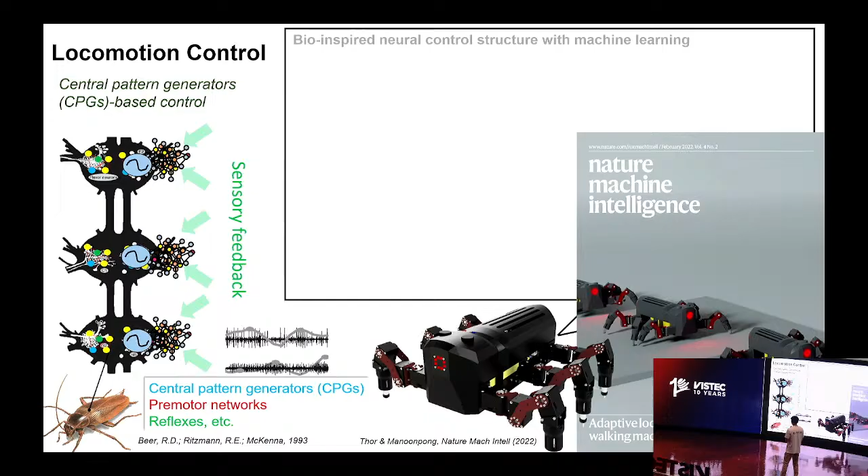We found that animals don't have one big network, but sub-networks, and different networks have their own functions. We break down the complex network into sub-network modules, and from this we created the first simple network, which consists of 2 neurons. By having these two neurons fully connected, it creates a rhythmic pattern, which is the baseline that can generate rhythmic movement and motions.

Afterwards, you need to shape that pattern into proper behaviors or motor patterns. You translate from the original rhythmic pattern from the 2 neurons in blue through the red neurons here. This is just a nonlinear mapping from one rhythmic pattern into something more complex.

What we do here is that once you have this architecture, you just learn the connections from the blue, or from the red, to the yellow neurons. That makes the network or the parameters small. You don't need to learn a big network because you create this from your own understanding.

By having this technique, you can use any kind of machine learning to adapt these synaptic connections from the red neurons to the output neurons. This way, we can speed up the learning process. The robot can learn here within a few minutes, let's say 20 minutes. We can scale down from hours to minutes.

So the take-home message here is that instead of starting from scratch, we should start from something understandable where we know the functions—what do we need? Now I'll skip this to go to the next one.

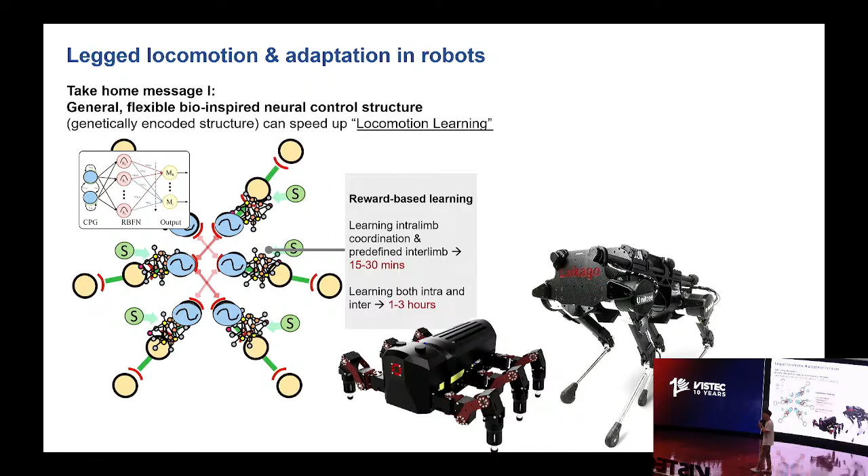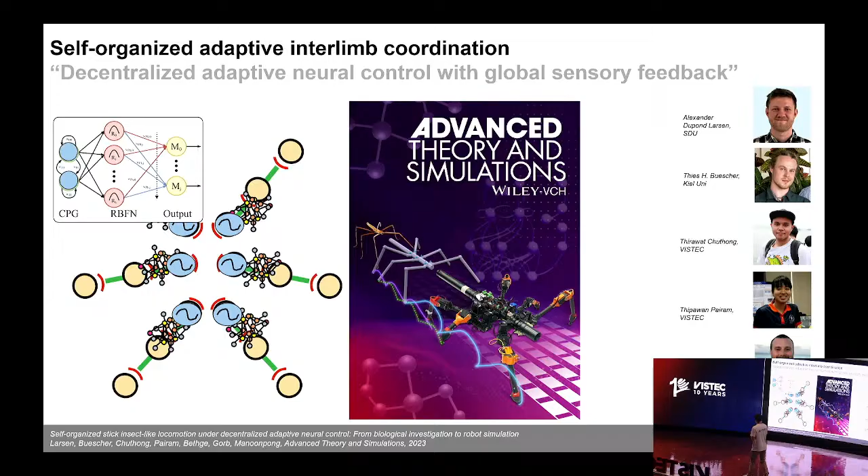The next thing I want to show is whether we can increase efficiency and decrease the learning and adaptation time from minutes to seconds. I'll skip ahead, but one key message I want to emphasize here is what we call predictive encoding.

So what do we do here? Imagine when you move or walk, you also expect something in return. When I swing my leg and touch the ground, according to that motor action, I expect to get force feedback at the end of my action. This is prediction. According to this concept, whatever you do—walking, manipulating something—you perform an action and expect something in return. That's what we call expectation.

Expected sensory feedback: what you do here is take the motor patterns that drive the locomotion and translate this motor pattern through what we call a forward model. The forward model is a neural model that translates the motor patterns that drive the behavior into an expected sensory feedback pattern. In this case, we translate the original rhythmic pattern into expected foot contact feedback using a neural network. Basically, it's just a nonlinear mapping into the expected sensor feedback.

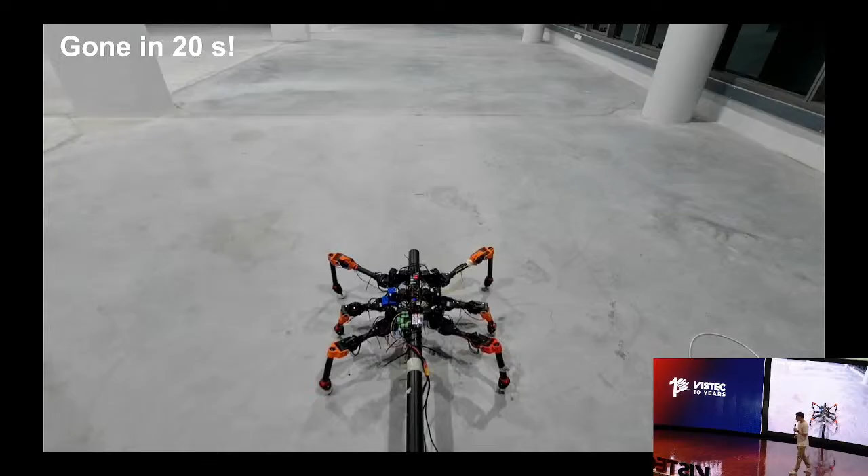This way, we implement this technique into legged robots. The robots start to oscillate. While oscillating, at the beginning, the foot cannot really lift. Because of the mismatch in error predictions, we use that information to readjust the phase relation between the central pattern generators, or between oscillators. Little by little, the leg starts to find out what would be the good phase shift by itself, and after 20 seconds, the system learns how to walk.

This is the decentralized manner. We don't let the controller on each leg talk to each other directly, but through the sensor feedback.

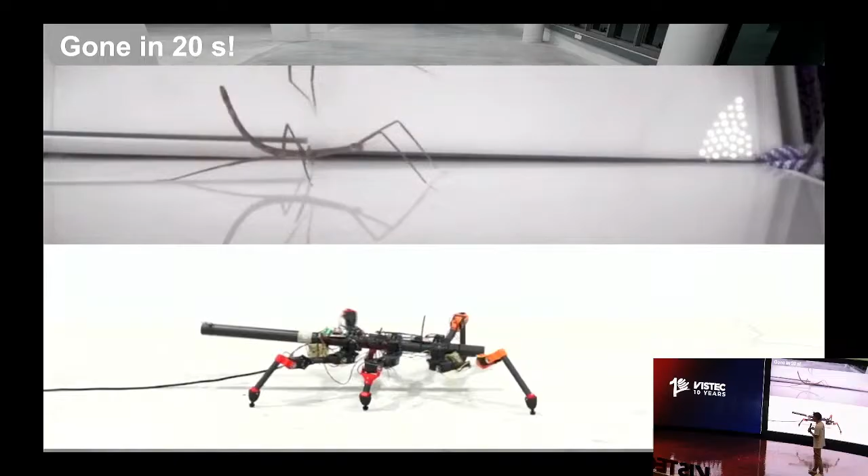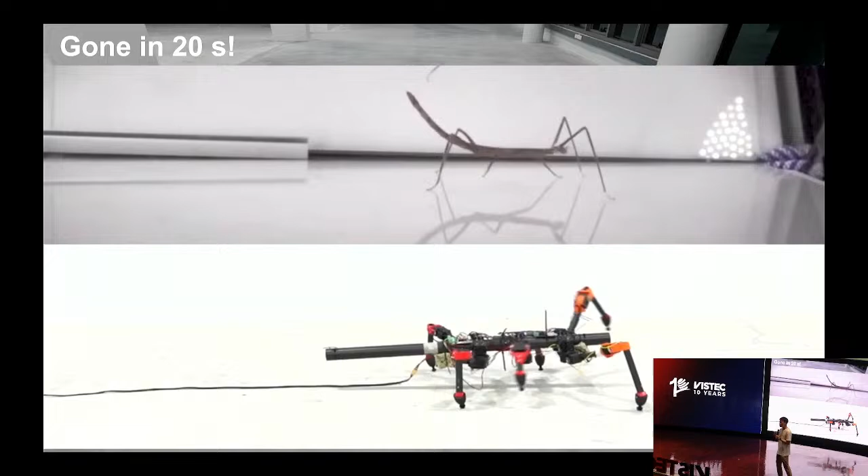Interestingly, the behavior converges to locomotion compatible with stick insects. What do we learn from this research? First, we can use just foot contact information, which is enough for forming locomotion. We don't use any joint angle, just the global foot contact information, which is enough to form a stable behavior comparable to stick insects.

I will skip all this. This is about learning and memories. I will skip all this.

So this is the other research. We look at how you can store information into machines, like robots. This is an example that demonstrates: if you look at cats, the cat can walk using visual information. Interestingly, the hind leg can step over an obstacle without seeing it. This is because the cat can store the motor pattern of the front legs into the brain, and it releases that information later. That is a kind of working memory.

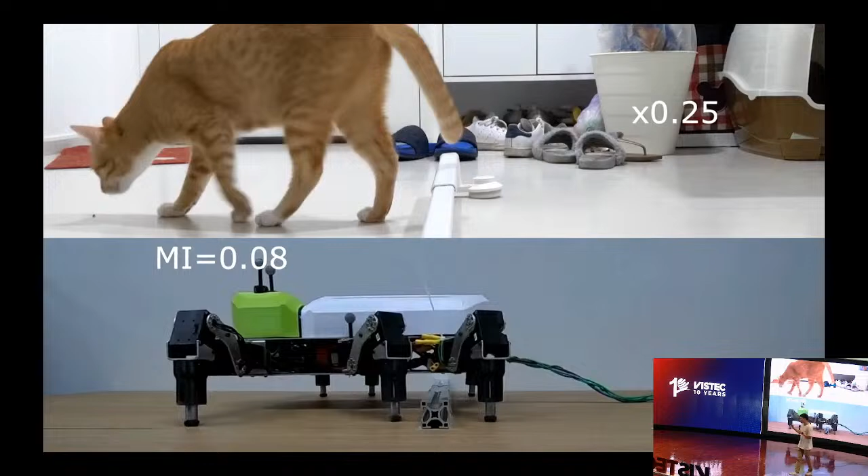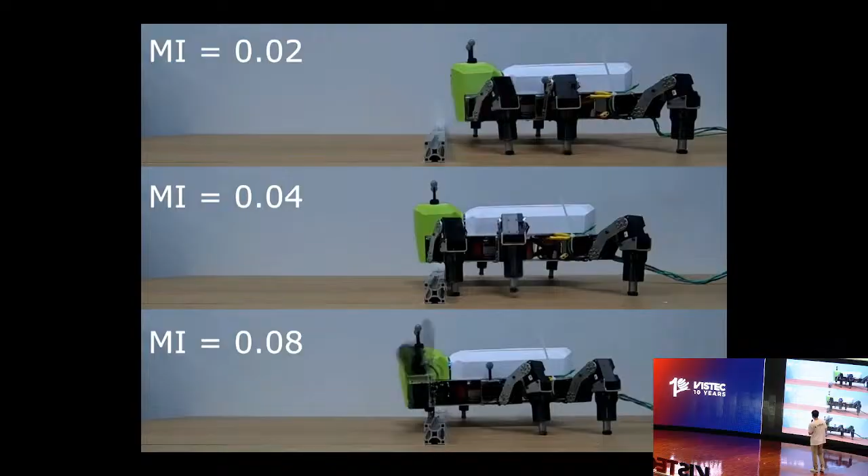We do the same thing here for robots. You can see the middle leg and the hind leg will not touch the obstacle, because we store the touching of the obstacle from the front leg into the brain of the robot, such that that working memory can store this information, try to match it to the walking speed, and release the action afterwards in time.

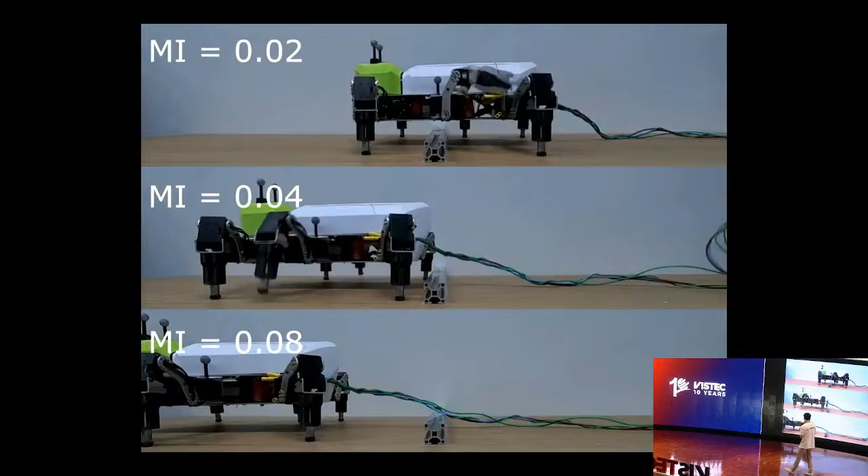One last thing I want to shortly show here is about the dung beetle, one of my favorite works. We learned from the dung beetle that it can transport a huge object. I tried the same thing myself, but it's difficult. I found a big ball and tried to push it, but it doesn't work. That's why we tried to learn how the dung beetle manages to do this.

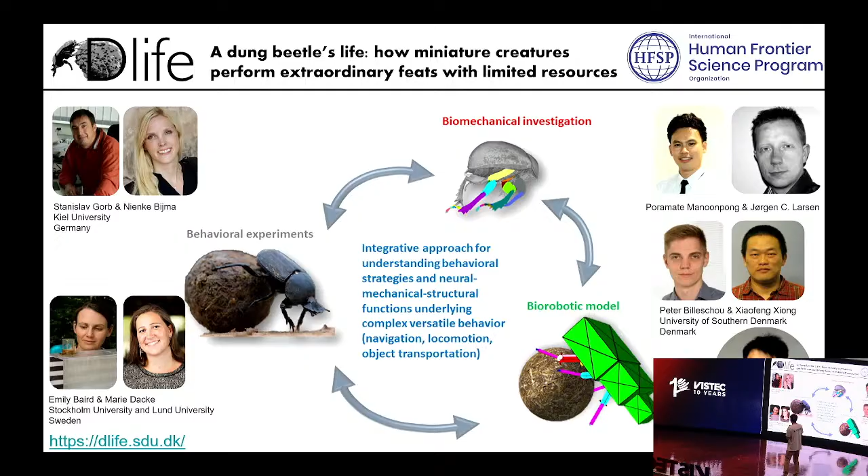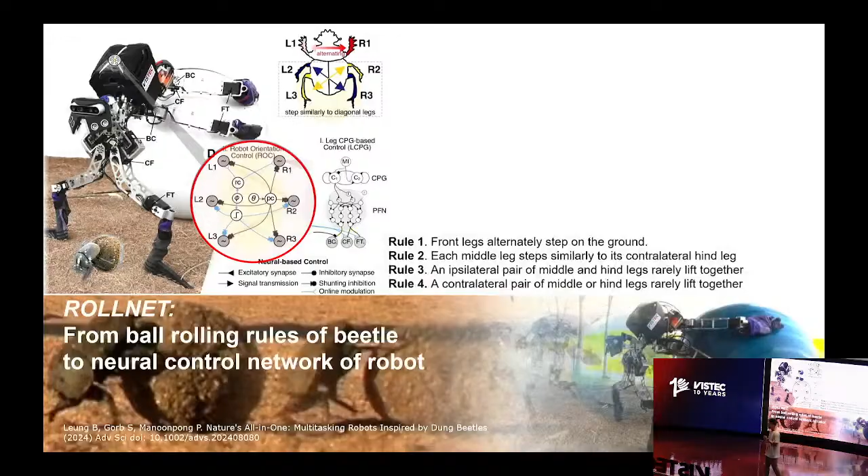From this, we came up with different subtasks. We looked at the biomechanics, and that's why I focus also on the embodiment. We look at how we can create a dung beetle-like robot by learning from nature. We look at the structure of the dung beetle, build the robot out of that, and learn some rules from the dung beetle through visual observation. We came up with a neural network that can make the robot roll the ball like the dung beetle.

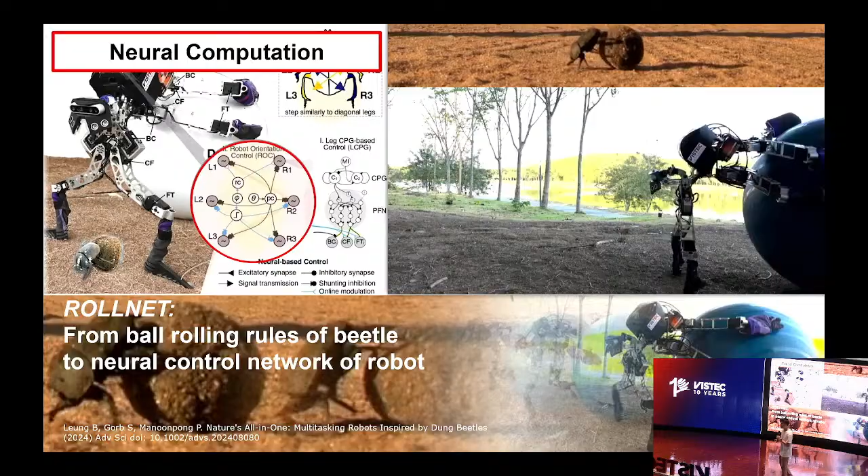Before achieving this, we implement a simple mechanism. I'll skip the rest, one last slide of mine. We look at the most simple way of controlling behavior. This is what we call Walknet. Walknet is just reflex-based control.

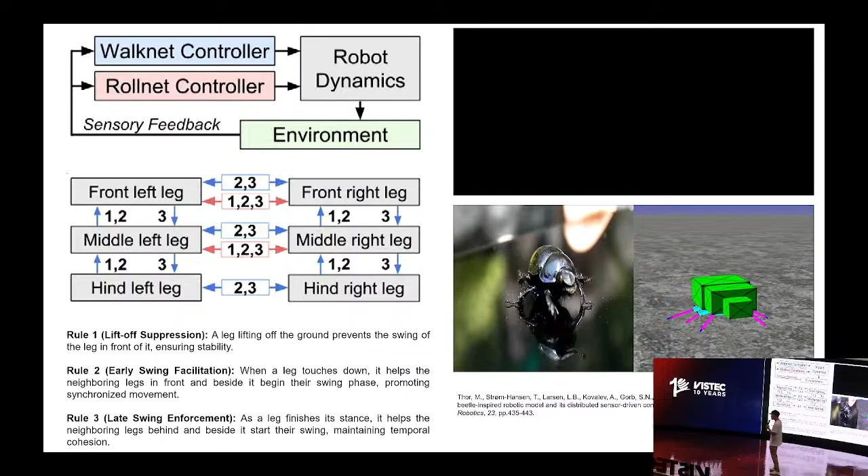What does it mean? It means you can use only sensor feedback to define or switch states of your movement. For example, we have Walknet, introduced by the famous biologist Holk Cruse. We take Walknet and adapt its mechanisms, which are based only on sensor feedback, into what we call Rollnet, and we introduced this Walknet and Rollnet on the dung beetle.

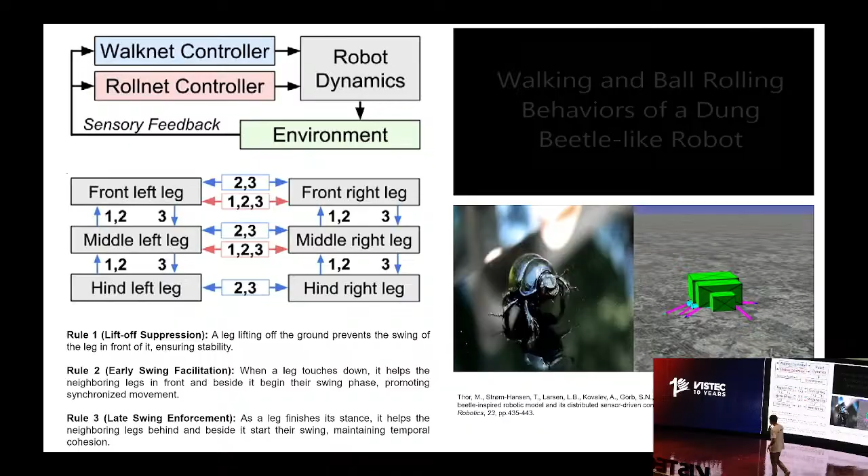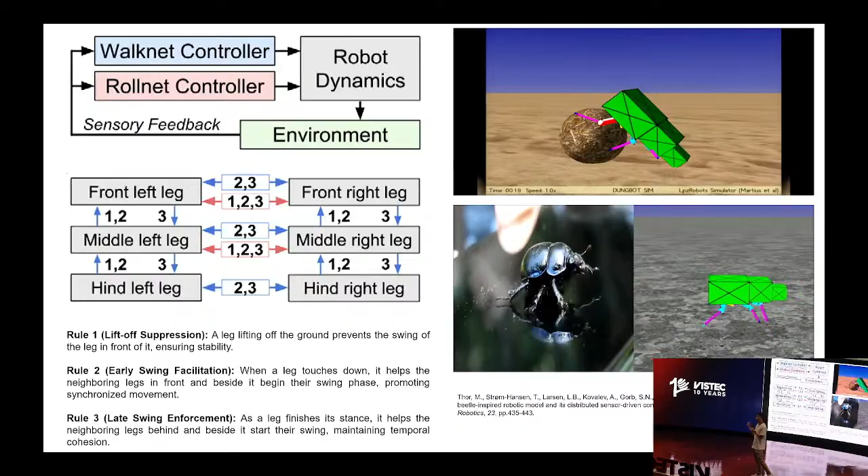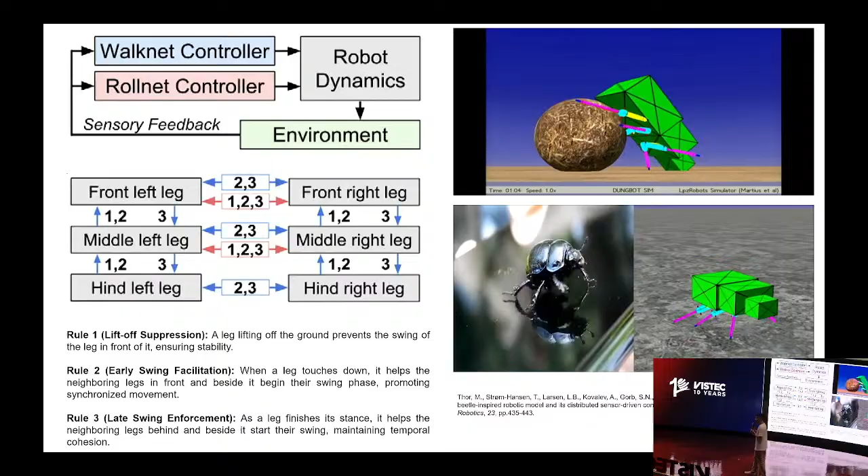This is our first version of the dung beetle-like robot. Basically, this robot doesn't have internal oscillators. It just relies on state switching from joint angle and foot contact. If the foot comes to the front to a certain threshold, it places the leg down. If the leg touches the ground, it switches the leg to backwards. With these simple rules, just 3 rules, we can form behaviors - in this case, 2 behaviors: walking and rolling the ball.

So what I want to summarize here: the first take-home message is that if you want to reduce computational power, you can try to set up network architectures that require only what you need. Once you reduce that complexity, you can learn only a few parameters. The second thing is you need to try to find a good error function - in this case, the prediction error - to adapt your control parameters.

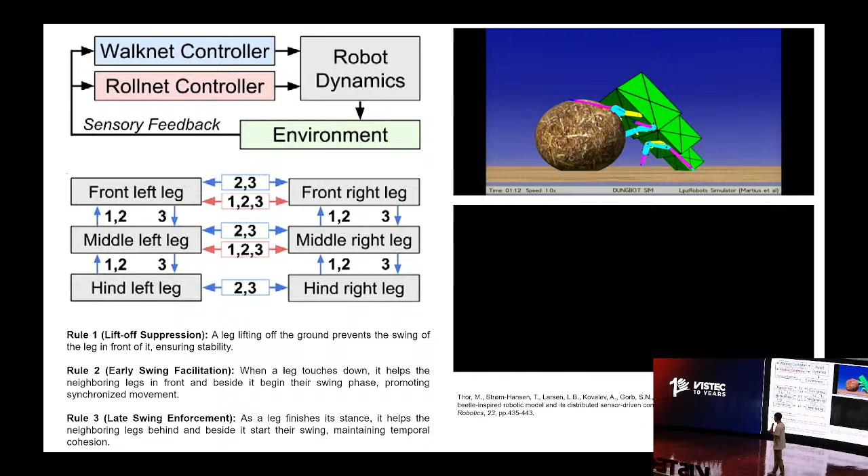We also have other works on different robots, including exoskeletons, and I think this will be my last slide. So in total, in our research, we work on 7 areas of robotics.

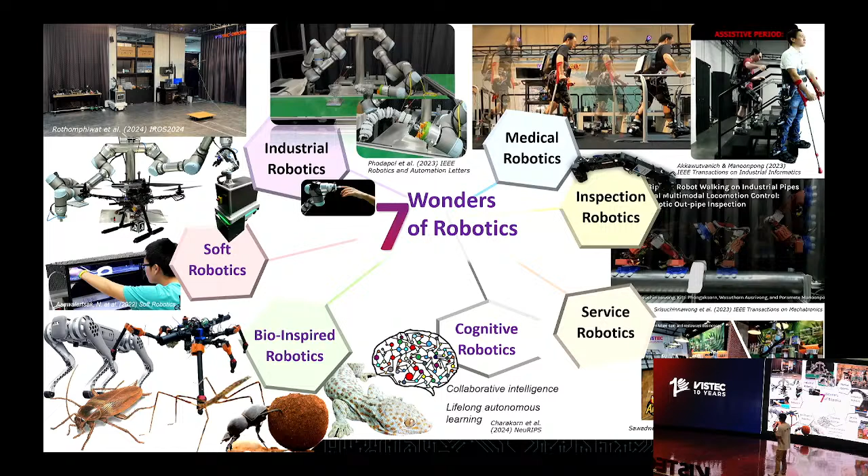We start from bio-inspired robotics, looking at how animals or nature work. We move into non-conventional robots, like soft robots. We look at industrial robotics, also in terms of drones, because drone is a platform that can have very dynamic behaviors. We're interested in how to deal with complex dynamic behaviors - walking has certain dynamics, but drone flying has more highly dynamic behavior. That's why we want to see how we can come up with neural mechanisms that can adapt to high dynamics. We also work on bio-inspired creepers.

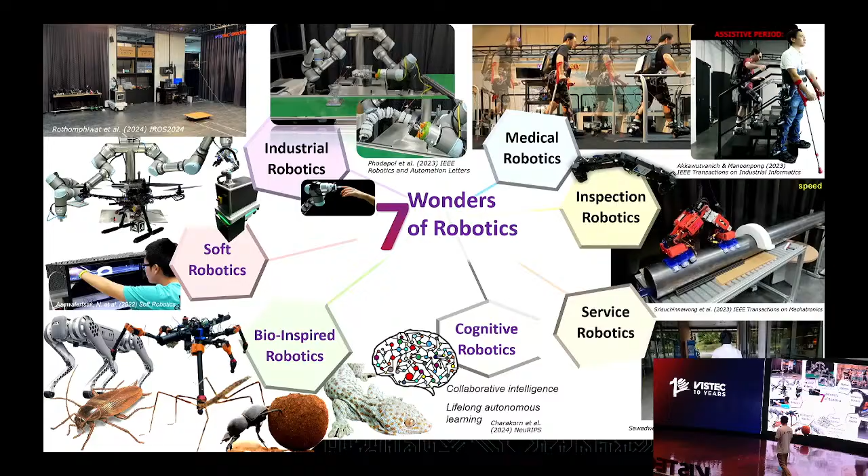Medical application - Dr. Chai Chan will talk about that. Inspection robotics and service robotics. I think that's all of our research. So basically, we try to bring from the right side to the left side by understanding nature, and hopefully we get new technologies. Second, we can come up with more understanding of how nature works. I think that's all from my side. I would like to thank you for your attention.

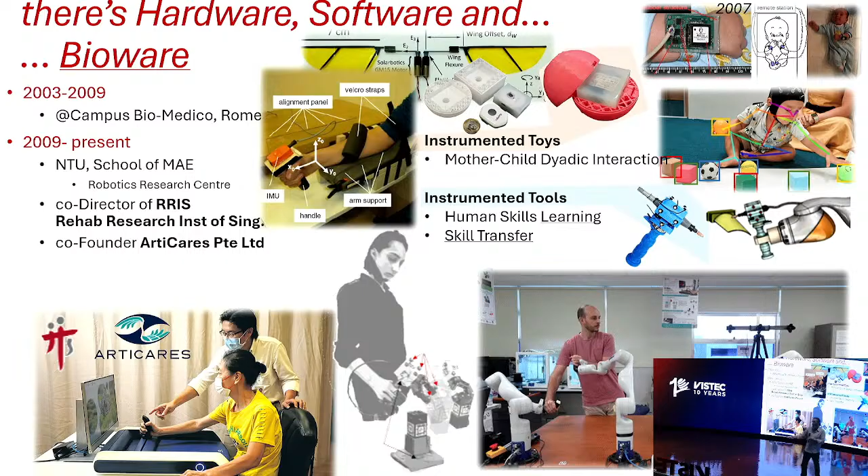In fact, a subtitle for this talk could be, "It's all in the wrist." In Italian, in English, I'm not sure in Thai, there's a saying, "It's all in the wrist," meaning that somehow the skill is in the wrist. Let me take you through an excursion of the work I've been doing here.

So, that's the alternative title. There's a little bit of history. I think it's nice to start with some history, and then I will go to more recent and more technical parts. I don't expect to cover everything; this is a general talk. If you have interest in these topics, we can discuss later the technical aspects. But if you don't follow certain aspects, don't worry, it's not meant to be detailed here.

All right, a bit of history. There is this nice paper that I really recommend you read. Neville Hogan is a big name in this field, in theoretical neuroscience, motor neuroscience. As you know, physics went from observations: you had centuries, if not millennia, of people looking at the stars, taking notes of what happens, and filling up records and records of events, like eclipses or other astronomical events.

But then came a time where someone, Kepler for example, went from heuristics to curve fitting. He came up with a set of 3 simple rules that would describe all the movements observable in the sky. Basically, he managed to put together tons and tons of papers in just 3 laws. That's a bit what counts as curve fitting in this context.

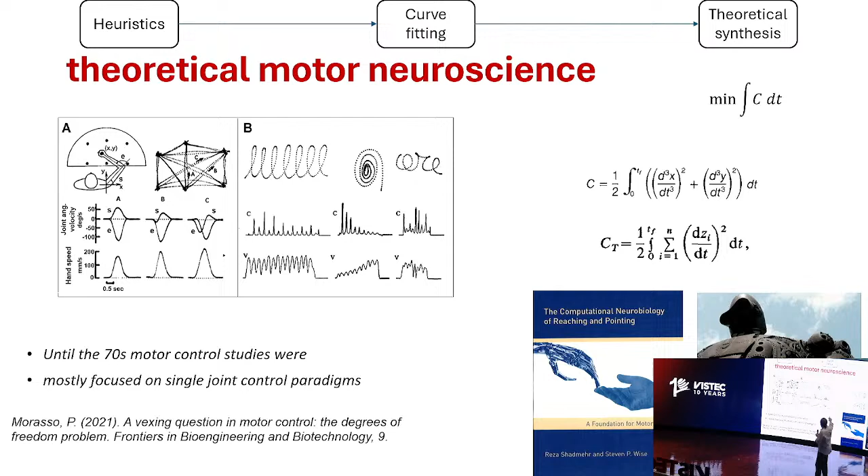And this has been synthesized with laws that are, for example, minimum or maximum smoothness. This goes by the name of minimum jerk. Jerk is the derivative of acceleration. So if you want a smooth movement, you try to minimize what is known as jerk, or third derivative of the position, or maybe you minimize the rate of change of torques. There are many hypotheses, and these equations, captured here, actually are able to some extent to describe these motions.

And one thing that I'm very interested in, because I work on upper limb for humans, even with the most simplistic model, it has 7 degrees of freedom. And if you have a degree of freedom for a rigid object, this thing I'm holding is 6, right? In space you need 3 orientations, 3 degrees for orientation, 3 degrees for translation. But my arm has at least 7 degrees of freedom, you can count from shoulder to elbow to wrist. So this is called redundancy.

This is typical. The human body, I guess also the insects' bodies, have way more degrees of freedom kinematically, even more muscular degrees of freedom, but let's stay on the kinematics, than necessary for most tasks. That means the brain has to come up with a solution.

So if I need to press the lever at the elevator, I can do this in multiple ways, and the brain has to decide one of these ways. And we do this without thinking much, but for robots it's a big headache.

Let's see how humans do it. So in the 20s, Bernstein, a Soviet researcher, started to look at very highly skilled motions. He's a blacksmith, so these are very skilled motions. If I tried to do this task, I would probably injure myself. And he started to look at how all the joints would move. This is the beginning of your OptiTrack, but he had light bulbs, so that was the very beginning of photogrammetry, right? And by looking at these motions, he actually started to hypothesize some behaviors.

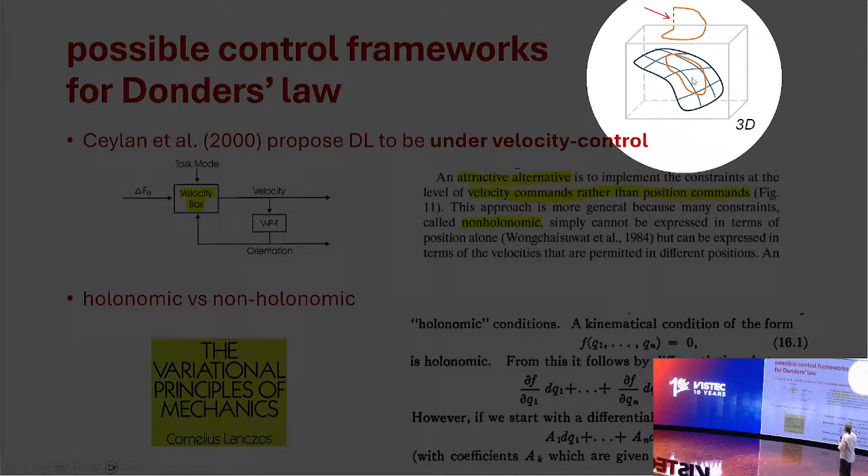This is a nice method because it allows for the constraint to be there, but it also allows the brain to change the constraint. So maybe these coefficients are a simpler way for the brain to tweak this constraint, because we need to also account for experiments where we go out of the constraint. We are not always there. So we are now trying to understand what's going on.

We have a bunch of frameworks available from the literature. We have any minimum principle, minimum, maximum, whatever you like. These principles are easy to implement, but they really are not compatible with Donders. You don't get a holonomic constraint when you have redundancy. Then you have the things I told you, but this is also not so good because I don't know how to reconcile posture and movement. There are other things I have no time to discuss here, but these are available frameworks.

We found from the literature this very nice, simple principle that helps us a lot. I've been playing with this principle for a very long time, and it's somehow very simple. It comes from early studies, year 99, 2000. Watch out, this is a very controversial law. If you talk to any other colleague of mine, they might not like it. It's controversial whether humans apply it. But in the end, we are engineers, so we implement on the robot whatever we like.

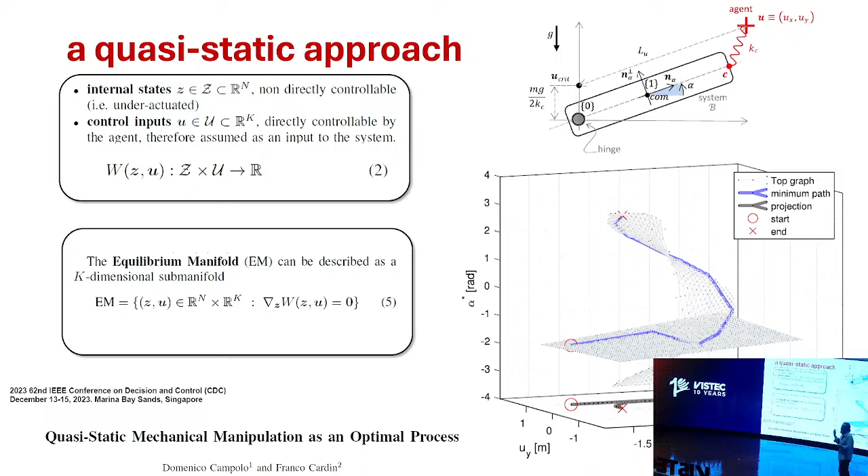That's actually the point where you go and touch the pendulum from the bottom. So somehow, it might sound trivial to us that to lift a pendulum, you need to pick it. But here, I'm not telling the robot. The robot discovers that the only way to get there is through that point. And to me, this is something interesting because this is something that we take for granted.

Okay, I'll go a bit faster, but we have used this in many ways, and if you're interested, we can guide you.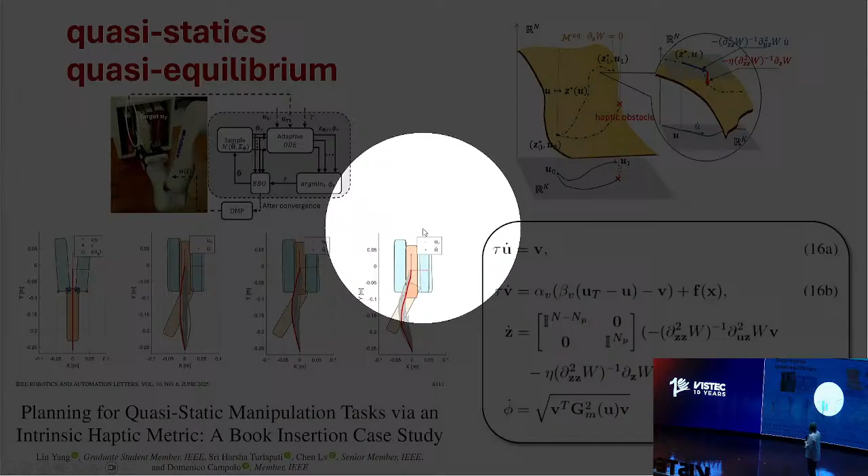My student, Lin Yang, has been doing this work on placing books into a bookshelf. The issue with the bookshelf is there is always no place. It's a crowded bookshelf, so any geometric algorithm will tell you there's no space, sorry, come back tomorrow. But when it's a human, you don't care, you just stuff your book inside. You press a bit harder and the book will fit. We would like the robot to understand that without telling it much.

So this is what's happening. You have the books, which have some elasticity, a lot of elastic components, and this is the book that you are supposed to stack in. The first attempt, here we use DMPs for the controls, and then we use black box optimization, like an evolutionary type of algorithm. Simple stuff. So the first attempt is to go straight and just push this book inside.

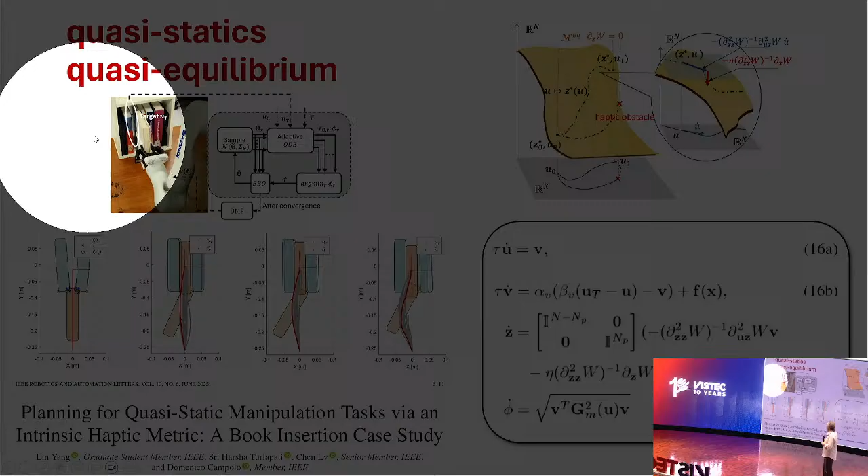Of course it will not be very successful at first. But very soon, meaning very few trials, just like a few steps, because the good thing of these methods is basically similar to the DMP, they have just a few parameters. So it takes very few trials to get something optimal. Somehow, with a few trials and iteration, the robot, in a sense, learns that you need to wiggle your book inside, coming in with a corner to make more room for it.

We did not program this behavior. This one came out. There is a theory behind it. If you're interested, I will guide you, but I will not go through this here. This is the theory, but all I want to say is there is some more mathematical aspect there.

What we have is a Riemannian metric. With this metric, we turn a motion control problem, a motion planning problem, into a manipulation planning problem. So this thing that you see there, G, comes from the potential. You set the potential, so there are no choices by me, that's the problem. Very often when you do optimal control, you need to come up with a very clever function to minimize, and that's an art, and it's fine. But this G, there's nothing that I make up. If I have the potential, I have the G, and here I need to square it. That's it. So we like this because it's principled.

And I'm going to conclude. This G, whatever it is, is the second derivative of a potential, which means it's a kind of stiffness. So in the end, we go in large circles in the theory, but we end up with stiffness, which is a bit what you mentioned as reflexes, the very first connection with the environment. If you go rigid on a wall, you'll be very hurt. So you need to adapt your stiffness when you deal with a wall.

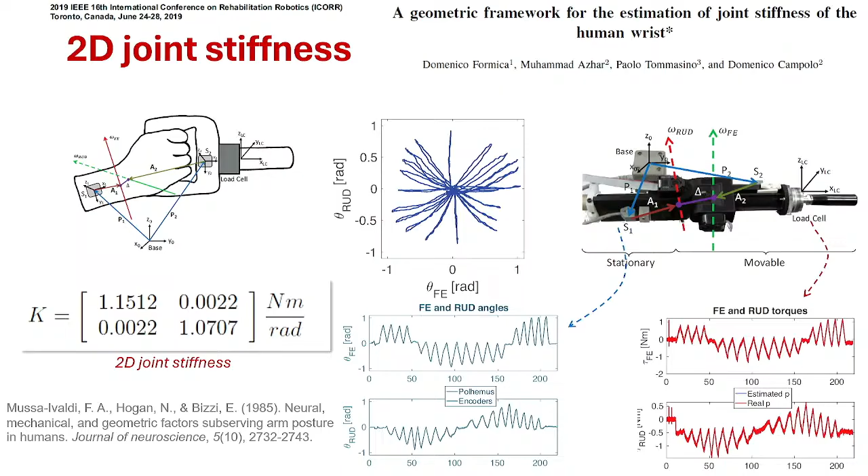When you go to 2D, things start to be complicated because now rotations are non-commutative. So if you start to take derivatives, you get Hessians, second-order derivatives, that are non-symmetric, and that is a problem. So, story short, we want a device that tells me about the stiffness of my wrist. So there is actually a clinical need behind this. I want the therapist here to move my wrist, and this device measures positions, so rotations, and torques. And by sensing position and torque, you should be able to estimate stiffness.

And there are many difficulties due to the rotation. But this is what the clinicians want. They want, in the end, a kind of ellipsoid, because stiffness is supposed to be an ellipsoid in the end. And the eigenvectors are really related to muscles. The human wrist has 5 muscles, and the direction of that ellipsoid really depends on the physiology.

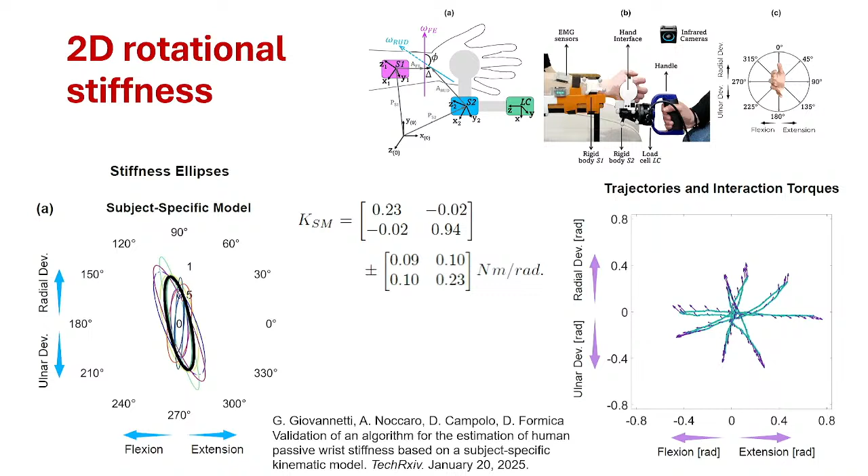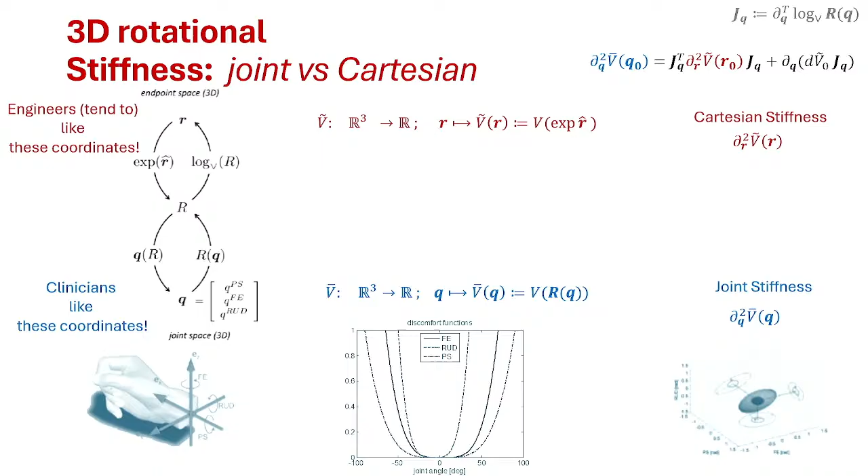It's even worse when you go to 3D stiffness. 3D stiffness is very complicated. Clinicians like to use anatomical coordinates, or cores. Engineers like to use the different coordinates that I told you about at the beginning. And mathematicians hate all coordinates. They really don't want any coordinates. It's very hard to talk to them.

So the problem that I'm hinting at, which I will not describe much, is that stiffness has very strange behaviors, and only kind of behaves well at the equilibrium when you don't have this term. And this is the problem of Cartesian stiffness, so it's stiffness at the end point.

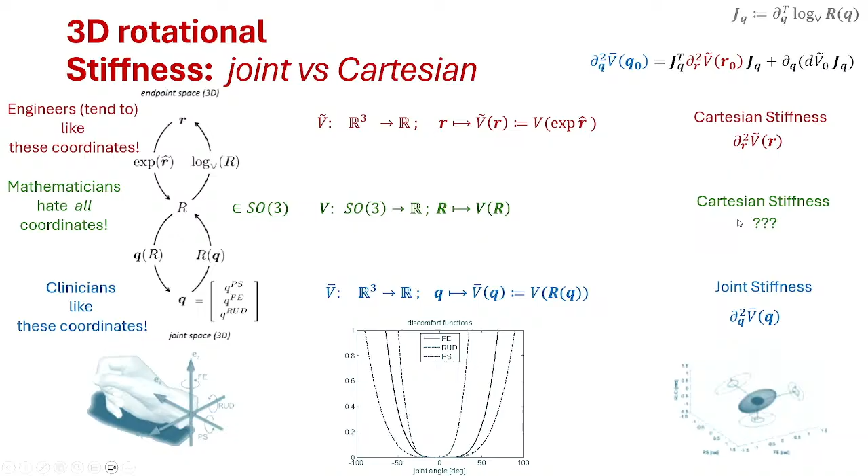There's some geometry behind that I will not go through, but in the end, you see, you start with a potential. SO3 is the space of 3D rotations, and you want to kind of work with second derivatives. There are a lot of technical difficulties, and next time we meet, I'll tell you about that, because it's a work in progress. But the idea is really this.

Now we are doing an experiment with our robot. We move our robot, so we program every joint with a linear spring, simple stuff. Then we move the end effector, and we perceive a stiffness. Now we would like to find it out from data. The data are terrible. Torque, force data are always terrible. And the idea now is to collect all the poses, all the wrenches. We call wrench the force and the torque together.

And we try to fit this equation because it's 3D rotation, a very weird equation. And the idea is to come up now with the potential, because this is an estimate of the stiffness, which we think is important for skills. Anyway, I'll stop here. I thank you all for the attention and for the invitation. Thank you very much.

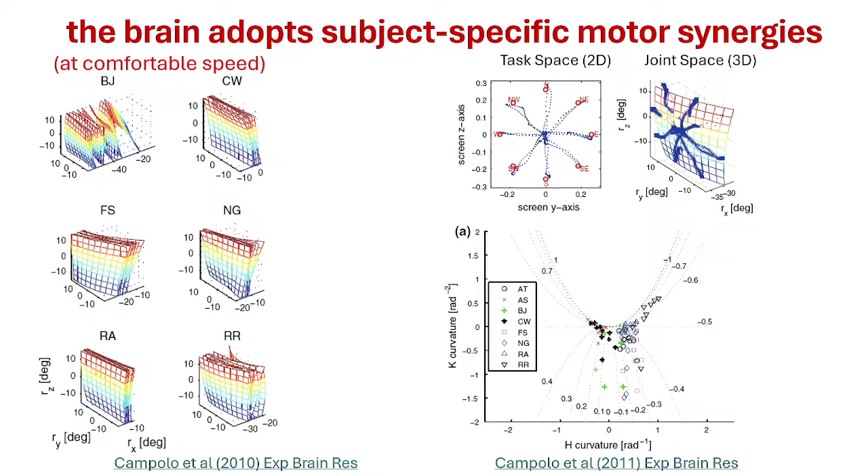I think this is very interesting, if I understood the concept correctly.

So basically, if you look at the joint space, you have more redundancy in the joint space. But to achieve a certain task, the system brings that into task space, which is where you interface with the constrained environment. In that way, you see the graph where you can look at the mechanics with less variability. That's because of the constraint of the environment that limits the variability. Similarly, when you want to carry a certain distance, the system tries to optimize the constraint such that it maximizes efficiency for the task you can produce.

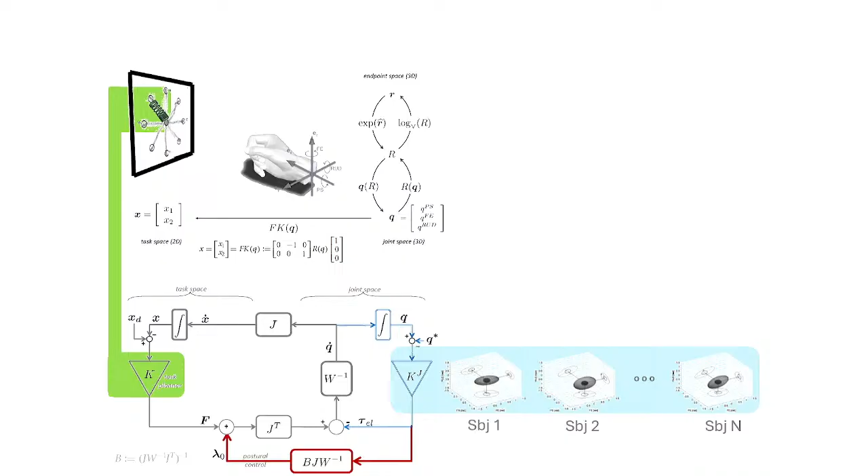This slide is this slide. Maybe I can do this. So look at the diagram.

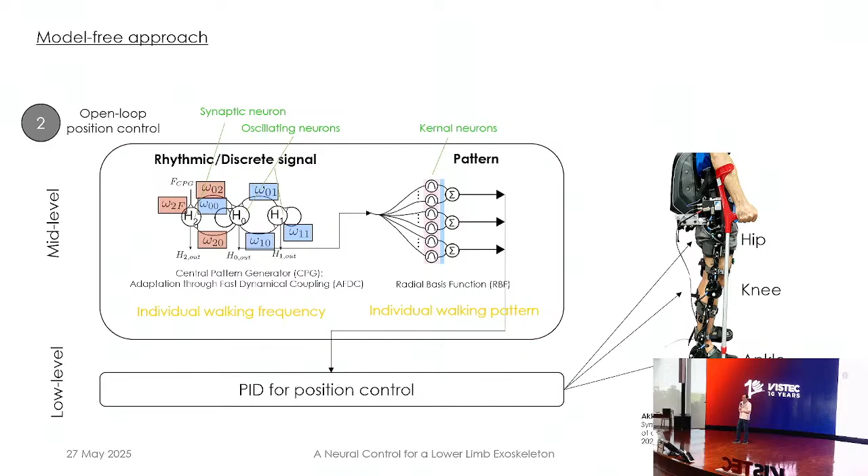Another point is that if you remember the last slide, you need a target first before you can activate this neuron. That means when you activate this, you need a learning from demonstration step first - you record, or let the expert or people train the robot first on how the pattern or walking frequency of those individuals looks like.

Then you let the neuron, or your control network, learn each parameter. Like when you walk, you use the hip feedback and put it back into what they call the CPG - remember the first slide, this hip pattern? The CPG learns what the frequency is.

It's kind of like you translate - you do the Fourier, but not in the offline frequency domain. It's an online time domain Fourier transform, because you get the hip feedback and translate it into the frequency, so you know the actual walking frequency of the person.

The other thing is that you just read the target trajectory from each hip, knee, and ankle, and then feed it into the RBF. So the RBF knows how to encode those feedback signals into just the weights of the network.

Then when you want to activate it, you just have the frequency, and you can generate the correct frequency through the CPG, then use the weight to reconstruct back the correct pattern for each person. This is the way we do the control for the exoskeleton.

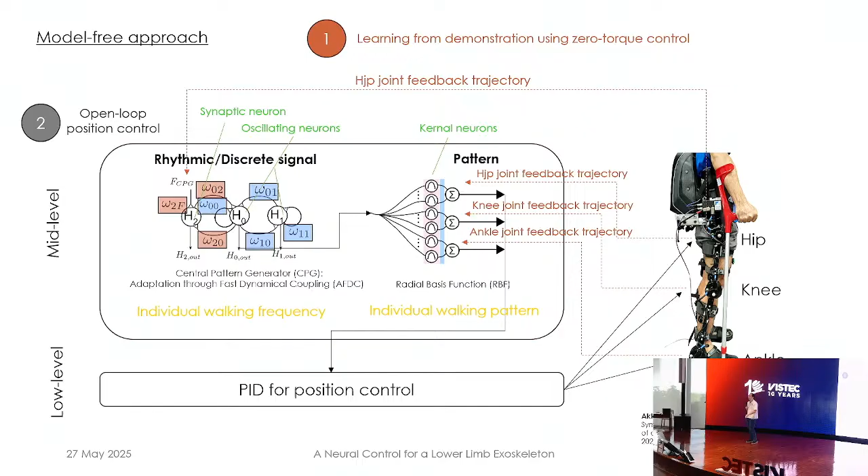For example, if you want to classify a walking pattern, maybe you embed it into the weight of the RBF already, and classify based on that database of weights. This may be a bit of a benefit of this approach. The other thing is you can monitor the frequency online, which is another benefit from this kind of network.

So maybe let's see the result. First you need to learn. For example, this walking frequency - I let the subject walk at different speeds on the treadmill, and we record for each speed. Then when you do the exit, I let the treadmill run continuously and we slowly change speed. We don't have the high level intelligence to switch between speeds automatically, we just use a person to switch the treadmill speed, and the EXO also needs to switch correctly. But what I want to say is that those speeds correspond to the treadmill speed - they're synchronized to each other. If it's not synchronized, the person cannot walk like this continuously, they will fall or slip off the treadmill. This is what I want to show, that the whole loop is working.

If you have high level intelligence, you maybe switch the speed online. But right now it's just manually switching.

Another thing is that it's not just the cyclic movement. The thing I want to show is that you can learn different patterns for each leg as well. For example, in a stroke patient, maybe the patient will walk at a different speed for each leg, or with a different pattern. So this kind of algorithm can also capture different patterns for each leg.

In this video we show we have a split belt treadmill - maybe the left side is very fast, the right side is very slow. We can capture this, and then after learning, when you deploy the algorithm again, it can assist the patient to walk at different speeds on the treadmill.

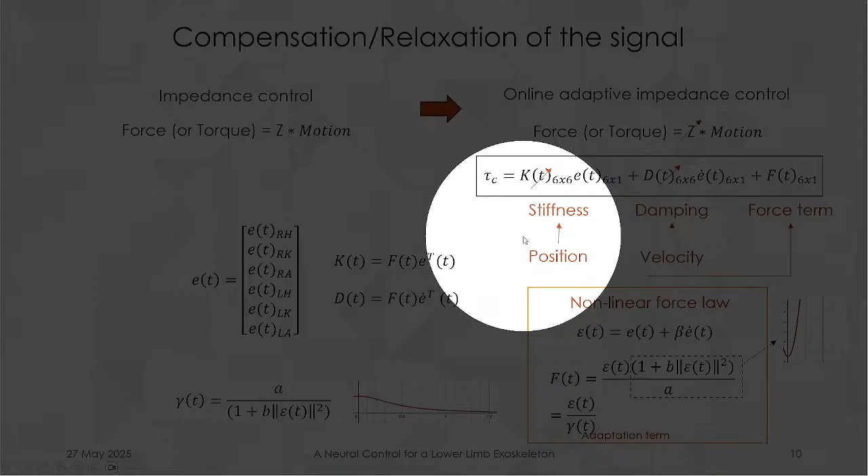Not just this normal online adaptive impedance control, but in our case, we want to add more terms. We call this one the gravitational term, compensation term for the gravity. We also add another term called the forcing term.

We can interpret this in another way: the first two terms we call the feedback term, because you get the feedback signal, right? But the second two terms we call the feed-forward term, because it's like you model it a bit, and then use this to manipulate your final torque. That's why we call this feed-forward. It comes from the forcing term and also the gravitational term.

Let's see one example. If you walk with just normal trajectory control, as I told you, if it's not synced, the patient cannot influence the exo. The exo will continuously drive you at that speed. If it's not synced with the treadmill, so it's out of phase, the patient may fall off the treadmill.

But if you use the proposed control here, during walking, the force from the patient or the subject can influence the movement of the exo as well, and also the force from the treadmill can influence the movement of the exo. So when you receive information from the environment, you can change the internal system, so the whole thing syncs, and you can successfully walk in this dynamic situation.

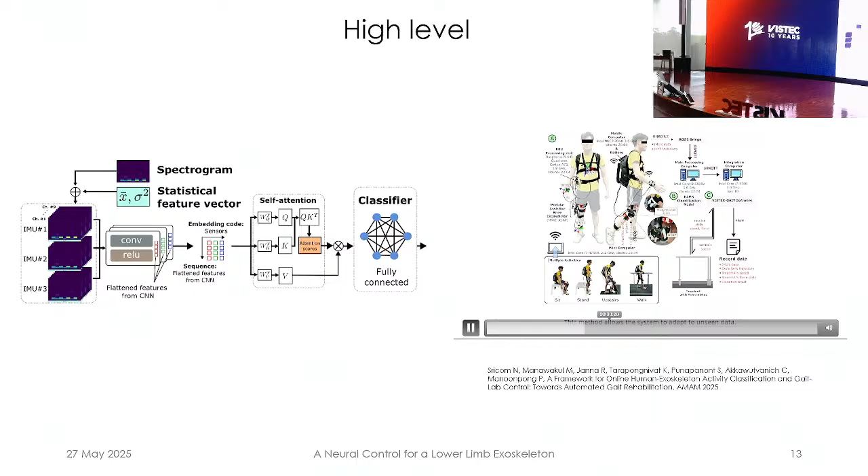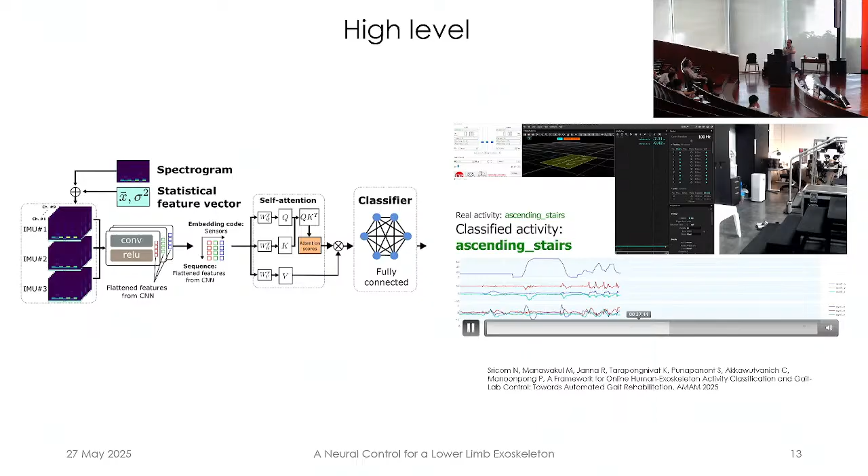Okay, and then it successfully walks in different situations. So it's successful - the subject can walk in different situations, like from sit to stand, walking up the stairs, and also walking on the treadmill. During those kinds of activities, the algorithm can classify correctly what the activities are. You may get some delay or some error, but roughly you can achieve 80 to 90% accuracy.

And this whole thing is online. So we pre-train the model first, and then when we deploy it, we do online tuning to successfully get the classification.

But there also is a weak point, because if you learn the new activity, the network tends to forget the old activity. So we need to solve this later in the next version.

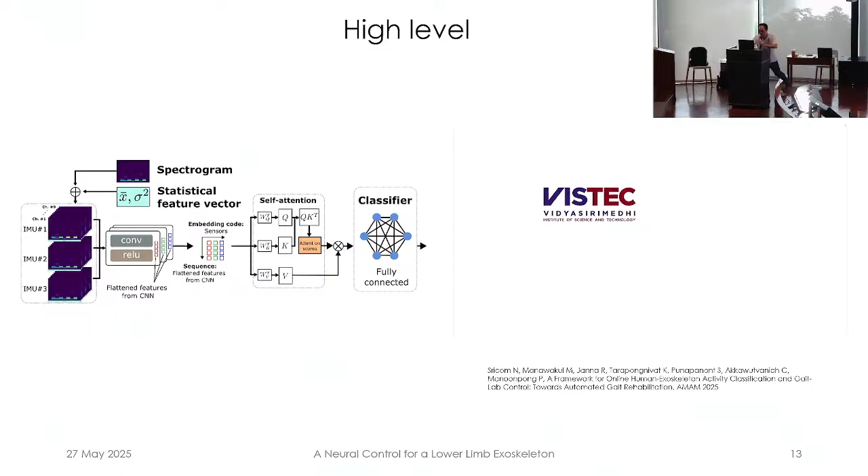So the next thing is that it's not only high-level algorithm, we also have the guy who tries focusing on how to do the good hardware. As you see, the exoskeleton itself is quite bulky, quite a big one. So we want to reduce it into modular things, and when you reduce it into modular things like a knee exoskeleton, you will face many problems like how to hang it, where to hang it, and can it be really good.

Can it be supportive enough and attach closely to the human in order to help the patient or not. So one of our guys developed the whole structure to be adjustable to every size of the patient, and also changed from the traditional strap into a more

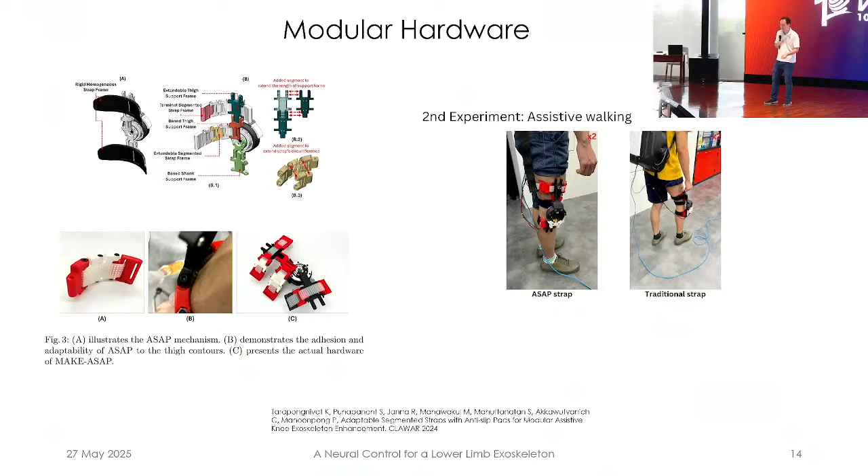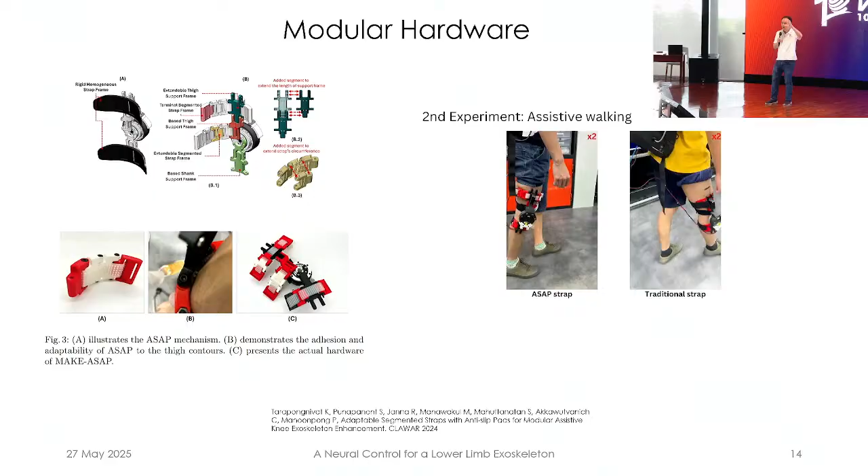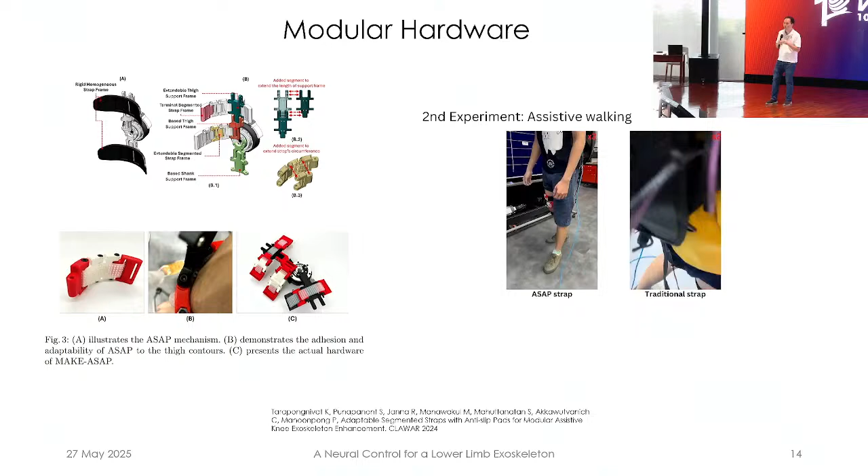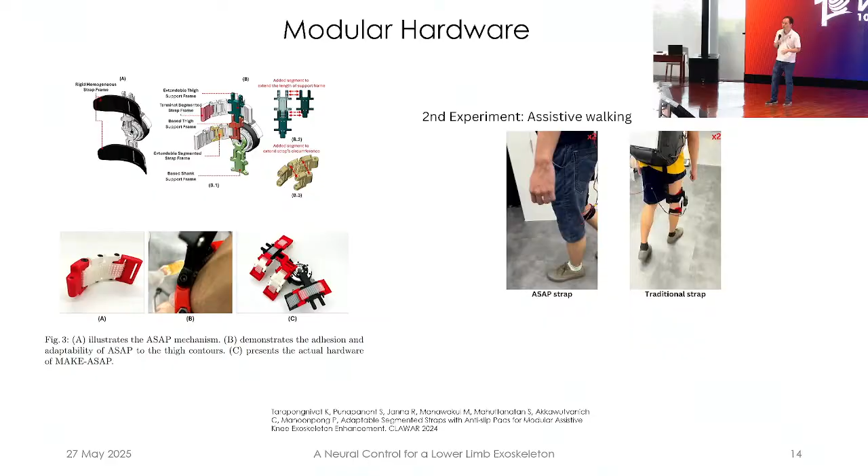adhesive version in order to help it lock closely with the patient's leg. And here is the result. You can see from the right side the traditional strap. So when you walk with this kind of knee exoskeleton, slowly it will shift down and slightly loosen from the body of the patient. But if you use our design solution, it will tie closely with the knee of the patient. With this tight lock, when you drive the control, the patient gets better movement. And not only that, if it loosens, you need high torque to drive it. But if it's very fixed, you can drive it efficiently.

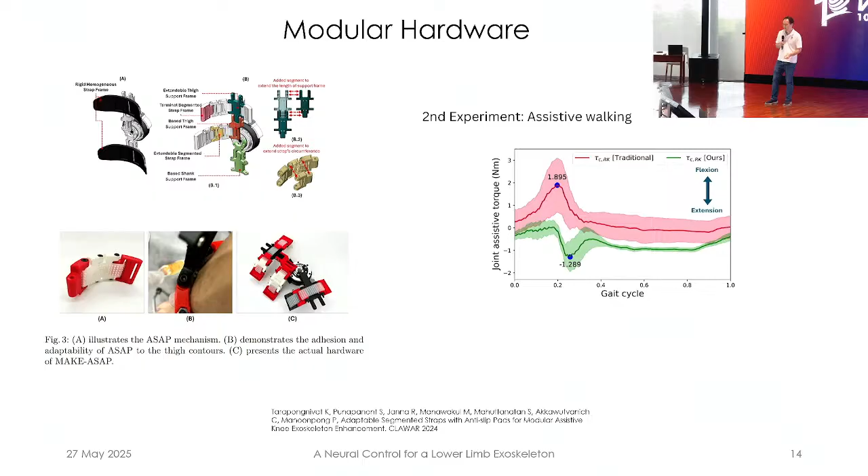Okay, and not only when we do things in the lab, right? Another thing is we want to connect to the outside. We want to test our algorithm and the whole system with the clinic as well. So we have experience when we tried our algorithm with two real clinical sites. One is at the orthopedic department at the hospital. The other one is with the physical therapy.

Lastly, the whole idea here is to let the therapist familiarize with the system, and also we want to evaluate our control with clinical variables like VO2 max or metabolic consumption rate, and also the EMG signal, the muscle activity. And also some comments from both the patient and the user, both patient and physiotherapist, about what it was like to use our system and our control.

So far it's okay, but it's too tedious and a bit difficult to interpret overall. But lastly, we got a comment that you need to reduce the size and design a more small or portable version so patients want to use it. And another thing is if your adaptation is not intelligent enough, it may confuse the patient. Like the patient wants to adapt, the exo wants to adapt, and there is a delay, so the adaptation is not that synced. This is one key message we got from testing.